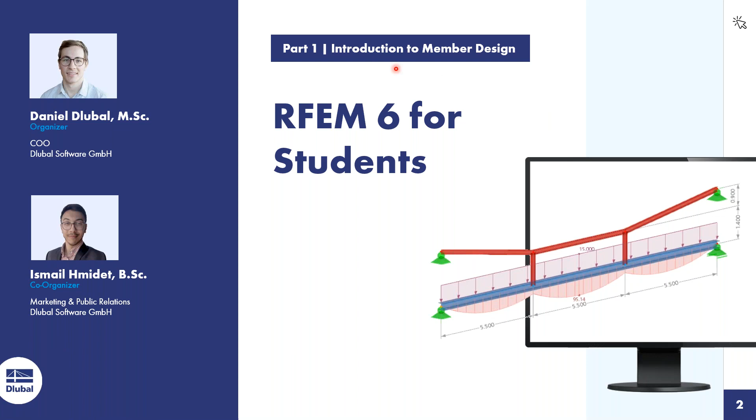Okay, I will stop sharing my webcam so that you have the possibility to see more of the screen. So, the first part of this online training series, RFEM 6 for students. We have the part of the member design today. So we will give you an introduction to the member design and a few words on our platform, GoToWebinar.

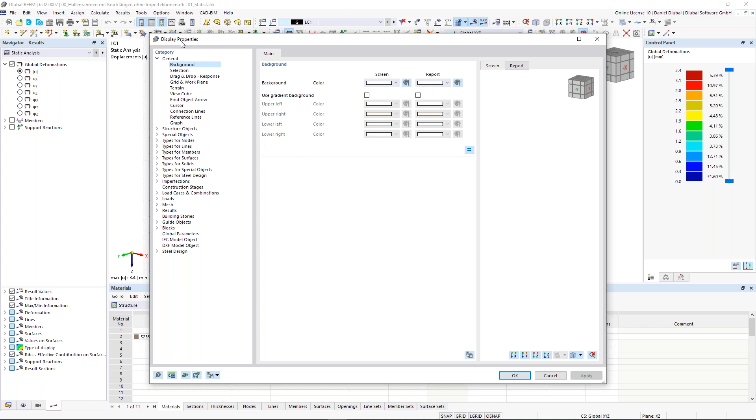Options is quite interesting. I work with a white window, maybe some of you use a black window, no problem. When I go to the display properties, I have the possibility to change the background, load dark background. When I click on that, it changes to dark. So it's up to you. I prefer the white background, so I go back to Options, Display Properties, choose the white background and click on OK.

We have today a lot of international students. So for those it's interesting that we also offer the program in different languages. Let's click here on Program Options and Settings. In the Settings tab, you can choose a program language from these. So for the French, Spanish, Italian guys, and so on, we have this language. Okay. And then I have also some other options, but for now it's enough to know that in the menu bar you find all necessary functions and commands. Good.

Then we have here the symbol bar. The symbol bar is fast access to the most important symbols you need during modeling, calculation, and load application of your structures. If you want to create a member or lines, just click on that, and then you can create it. I love working with them. It makes the whole process very fast, and also some visibility options here and so on.

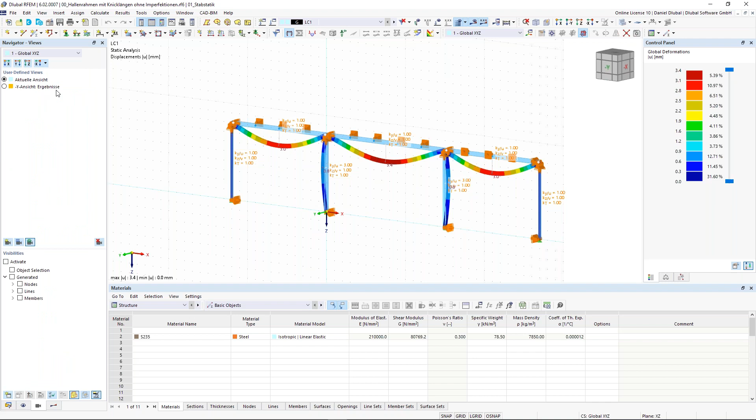Currently I see the structure from that view, and when I just want to see the results from the global y-axis, or against the y-axis, I can click here and I see it like that.

Then I also have the possibility to set up some visibilities. I activate here, for example, members, and choose here the member by section. I am interested in the IPE profiles, and I see it here like that.

Perfect, so let's jump to the last navigator. This is the result navigator. Here I have the possibility of showing different results.

So in this case, the global deformation. When I'm interested in the internal forces, I activate the members, activate the internal forces, for example normal forces, bending moment, shear forces, and of course also the support reactions.

Yeah, so much to that. Then we have the tables, where you have a whole overview of all objects. You can also create objects in the tables, edit them, and change values. This is a huge advantage because it gives you a very structured, very good overview, which is very clearly structured.

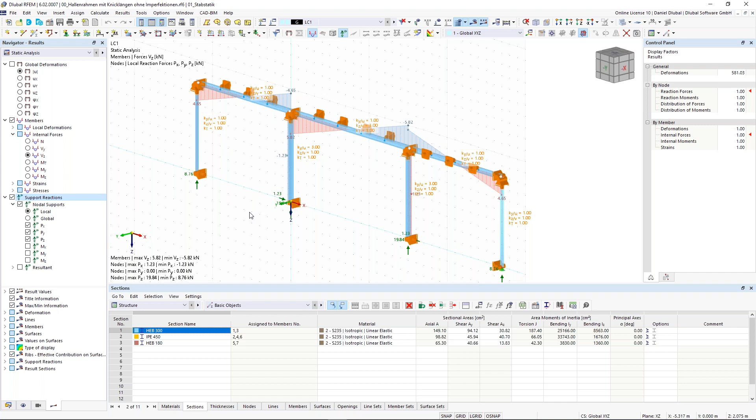Okay, now the control of RFEM 6 is quite easy. It's familiar when you are familiar with other software applications like CAD programs, AutoCAD from Autodesk, then you will get familiar also with RFEM 6.

So with the left mouse button, I can select different things. When I go from the left upper corner to the right bottom, then I can select all objects which are included in the selection window. When I go from the other side, I select all things which are also in this window, but not as wholes.

I can select them as a whole object, so everything that is touched within this selection window will be selected. Okay, so much to that.

When I want to select more objects, I click on one object like this member and press the Control key on my keyboard, and now I choose another. I add new objects to my selection by pressing the Control key. In this case, I select different members. And when I want to deselect some members, I just press the Shift button and deselect some objects from my selection.

By right-clicking, I activate a kind of context menu. It shows me some interesting information, like the display model. I can change it to the wireframe model, or maybe deactivate the loads or the results.

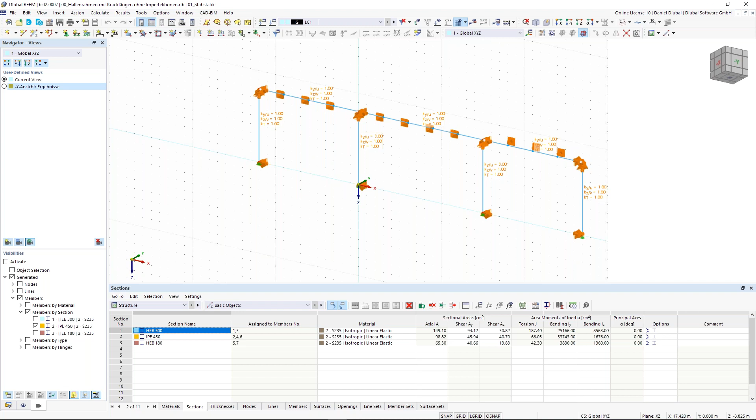Very nice. You can also use this view cube. It's a new function in RFEM 6, makes it a lot easier to change your views for your structures.

Okay, good. This was the introduction to the user interface of RFEM 6. RFEM 6 as a program is a 3D FEA program for the calculation of members, trusses, but also for surfaces, shells, and also solids. With RFEM 6 as a main program, you can calculate and get the results of internal forces, stresses, support reactions, and deformation.

When you want to perform different material-based designs like steel design, timber design, and concrete design, you need the add-ons. The add-ons will be part of our later trainings in 3 or 4 weeks, where we jump into the steel design, concrete design, and timber design.

Okay, now let's start with a very simple example. So for those who would like to model with me, now follow my steps. I create a new model by clicking here in the file menu and selecting create new model.

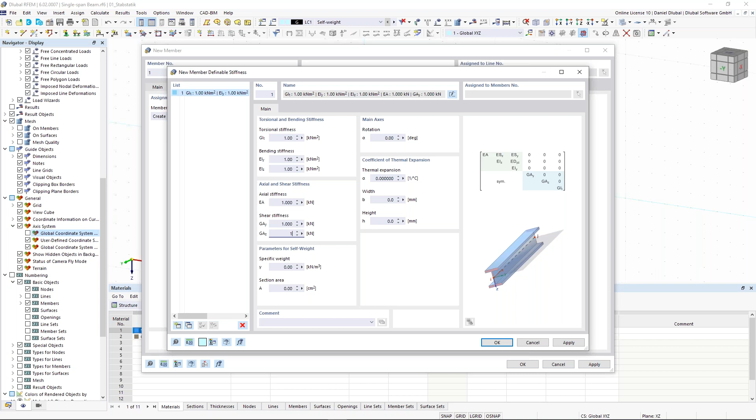I go here to the register definable stiffness and create a new stiffness. Click on that, and now I insert very small values, because in reality we have higher values, but for this example it's enough to insert this kind of pseudo stiffness. I click OK, click again on OK, close the member window, and then you see the member activated. I click OK, and the example is ready.

So you see here this member as this kind of thing. Now we need support. I go here again to the symbol bar, click here on assign nodal support,

and I choose here the hinged support, so I will activate all translational forces. Choose this node, right click to close the function, and now I go back again and choose the support with the roller in the X direction in order to release the X forces, and now I have here a single beam.

I can show me the supports a little bit bigger just by right-clicking on it. I can adjust the size of the graphic, and now I activate load.

In RFEM, it's like that when you want to create loads, you have to assign them to load cases. And by every new model, one load case, in this case the self-weight, is already done automatically in the background.

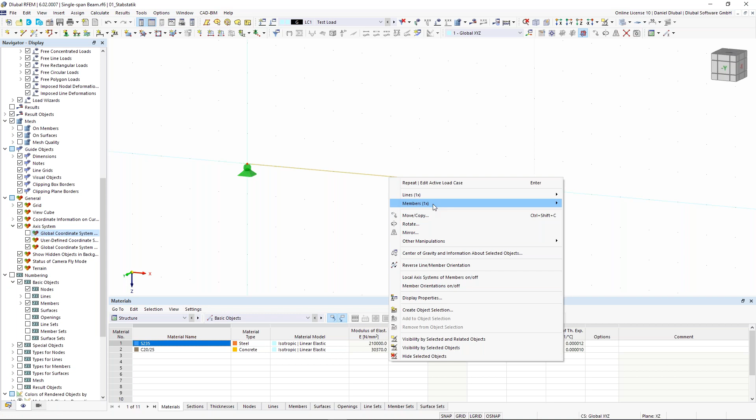And now I divide here this line, because in the middle of this member I want to create a node, and on that node I want to create a single load or point load. So right click on this member, and I divide it by distance. Now let's enter here the value of 4.5 meters - the other one is calculated automatically. And now the important thing is to create on member nodes without dividing the member.

So activate this option. Then we get a node which is part of the member and doesn't divide the member into two members. I click OK, and now you see what I mean - we have here one member and this one node, part of the whole member, and the member wasn't divided into two members. It's a huge advantage, because then I can take a closer look at that member as one member.

So now I create my single load. I go here again to the symbol bar, click here on new load, and now I click on assign to nodes. So here I select the node in the middle, I can draw a selection window, click OK. Enter here a value of 10 kilonewton. I say OK, and we have here the load.

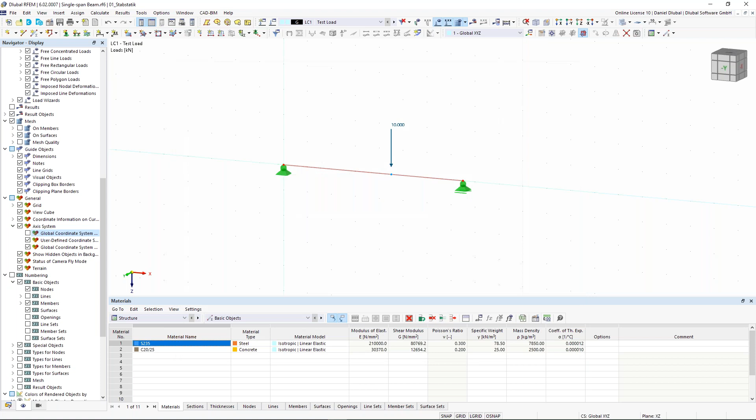Okay, so first of all, we see the deformation. The deformation is, of course, a little bit nonsense, because we have 99,000 millimeters deformation, because we don't have any stiffness. But in this case, only the internal forces are interesting for me. And when you have statically determinate systems, then the stiffness of a structure doesn't have an influence on the internal forces. Only when you have statically indeterminate systems does it have an impact.

Okay, so I go here to members in the results navigator, and I activate the shear force. I see the shear forces in kilonewton, and then the bending moment, My, 18 kilonewton meter. Okay, interesting. So now I activate the support reactions. I see the support reactions, also pretty interesting. And now you can make a kind of plausibility check. Compare the support reactions with the shear forces, for example, and they are the same.

So this was the first example. Pretty simple, of course. For the next examples, I will use real cross sections because this makes, in my opinion, more sense. It was just an example for when you are at the beginning of the semester, you have started your bachelor, and you calculate some structural systems. Normally, you don't have any information about the stiffness, and here you have the possibility to consider these kinds of exercises.

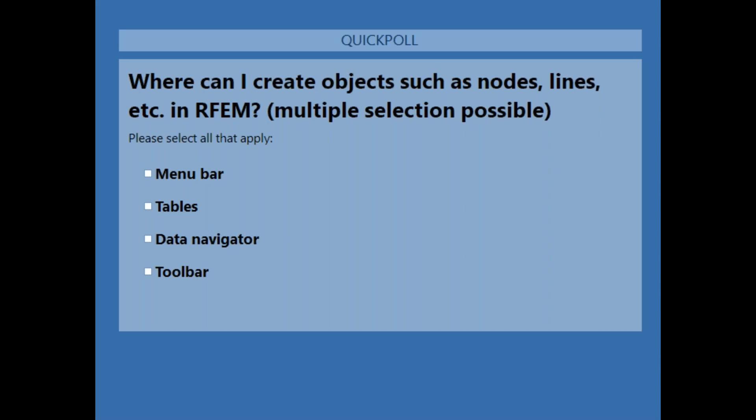Okay, good. I will close this and share the results. It was a multiple selection, so several answers can be correct. And in this case, all shown answers are correct. So I can create objects with the help of the menu bar, tables, data navigator, and also the toolbar. Okay, let's go forward with the next example. This example is also for those who want to do this in parallel with me.

Daniel, yes. Before we move on to the next example, I just wanted you to highlight the difference. I got the question: what's the difference if the member were split into two? There's no difference in terms of structural behavior, right? Exactly, absolutely correct. There's no difference in the structural behavior and the results, just in the result interpretation.

It makes it easier for you because you can choose this one member, and when you would like to see the results at one member, just right click on the member and create a result diagram, and you see it as one result diagram. This makes it easier. Or when you want to edit several members, and you have several nodal point loads, it's easier for handling and usage. So there's no difference in the structural behavior and the results, just in the handling of how you define these nodes. Exactly. Thank you.

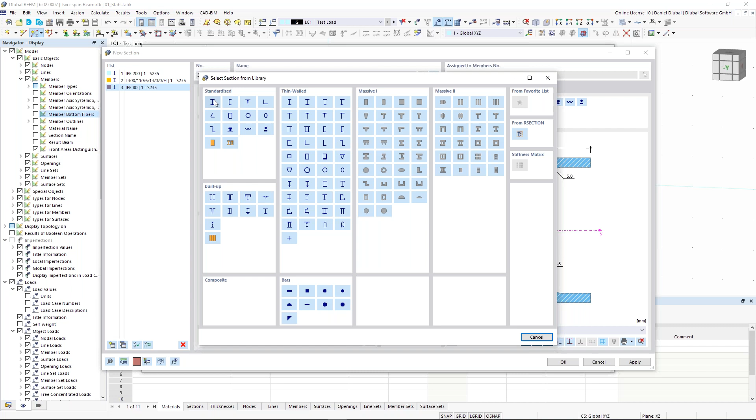And I open here the cross section library. And I am looking for a standardized profile, so in this case, an HEB profile. So I scroll a little bit down and then I will find here this HEB profile. I refer to the Euronorm, so more to the Eurocode. And here I find HEB 300. This is absolutely fine for me.

When I know the profile, then I can also insert here the name of this profile, and this makes your searching for the profiles much faster. So just insert here HEB 300 and you jump here to the existing profiles based on our search function. And this makes this whole thing very fast. And now I choose here this Euronorm, double click on my HEB 300 or just press here OK.

So, and the same thing we can also do with the material. I use for this profile an S235 material, so steel with a yield strength of 23.5 kilonewton per square centimeter. I can also create here a new one, searching for it with the help of the searching function.

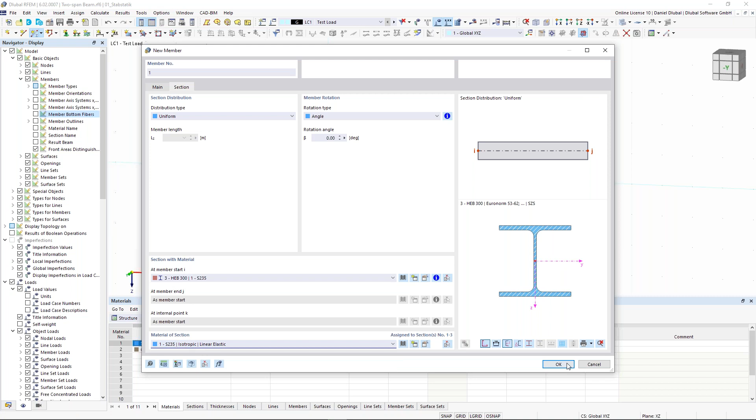So I can enter here S235 and now I can choose here the one I would like to have. But I don't do it because I have it already here in this case, so I cancel it and I just need here this one. Okay, I click on OK. And now you see here for my member start, I have here this HEB profile and this material. I click on OK.

And now I create a beam with a length of 5 meters. So just go here to this grid point, 5 meters, and again 5 meters. So the total length is 10 meters, but in the middle I have here this node. So the next thing is that I want to have here support directions. So I activate here this nodal support again.

And now a very interesting function in RFEM is that we have here also this apply button. And I show you how it helps you to define or assign different objects easier for your structure. So for the first node, I would like to use here this hinged support. So I choose here this hinged, this node, click on OK. And now I don't click on OK, but I click on apply. And this node

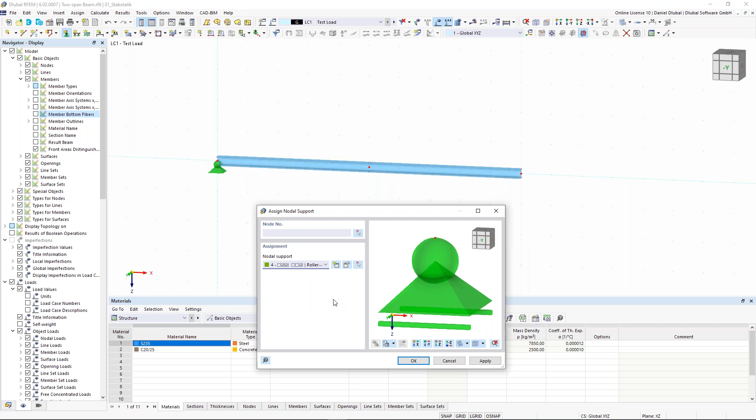will be created automatically. And the next thing is that I change here the nodal support, choose here roller in the X direction, and select both nodes with a selection window. Click on OK again. And now I click again on apply. And now you see how easy you can do this with this dialog. I click on OK. And now you see here the structure. Perfect.

So what's next? The next thing is that we consider now different load cases. Because when I refer to my PowerPoint, I will show you my PowerPoint. We have here this two-span beam, the information about the profile and so on, and also here 3 different load cases. And I would like to combine them in order to determine, first of all, the results, like support forces, internal forces, and so on, but also the governing or leading load combination that causes the largest internal forces. Because we will have here also 2 additional load cases, the imposed loads, first for the left side of the beam, and then for the right side of the beam.

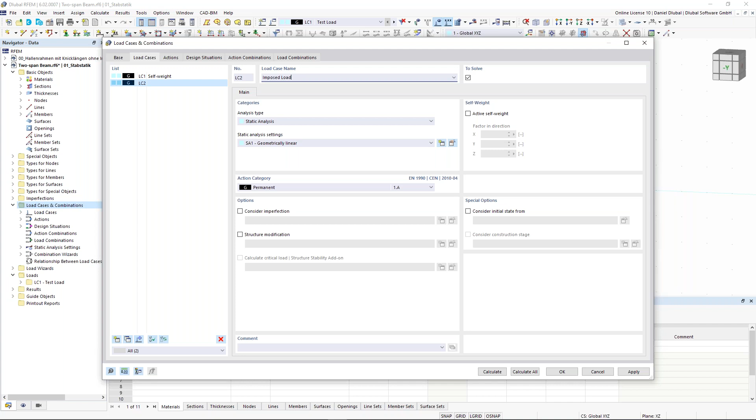I activate here the self-weight. And I create 2 new load cases. So the new load case is imposed load left. I choose the correct action category, in this case imposed loads category A, according to my European standard. And now I copy the load case and say right, because with that load case I apply the loads on the right field of this member.

Okay, now let's go through the tabs. So actions, I think this is pretty clear. I have here this permanent category, so permanent loads, in this case the self-weight, and here we can see which load cases are affected by this. Then imposed loads, these two load cases, and I have here different action types. Different action types: alternatively, differently, and simultaneously.

When I choose simultaneously, this means that both load cases can be combined with each other. Alternatively would be they would exclude each other. So simultaneously would mean that load case 2 can be combined with load case 3. Alternatively, load case 2 with load case 3 can't be combined.

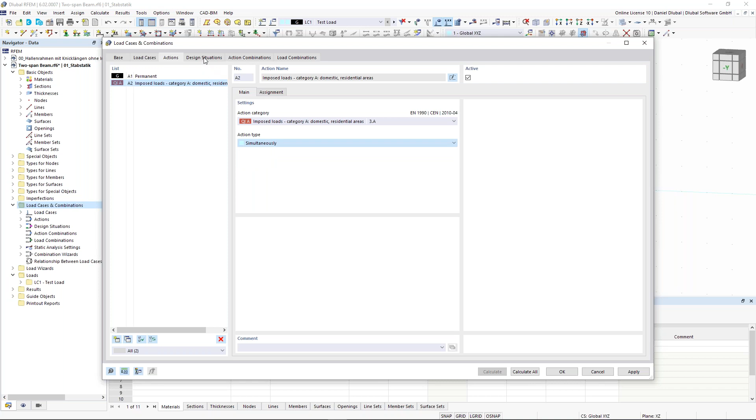Okay, so let's go to the design situations. According to the Eurocode, the European standards, we have different design situation types. The serviceability state isn't interesting for me, so I delete them. Just the ultimate limit state. I go here through the information, and here you see short information about the combination rules. So the permanent factors, partial factors, and also some combination coefficients. So it's interesting how the program combines the factors for the load cases.

So now you can see here the action combination. Now let's jump to the load combination, and let's pick this one. So here you can see the partial factors, that is 1.35 times load case 1 plus partial factor 1.5 times load case 2, and so on. And here you see also these leading load cases or leading action categories. It's pretty interesting to know how the program considers these different load combinations. A load combination is nothing else than a combination of different load cases under the consideration of these partial factors and combination factors. Okay, I click on OK.

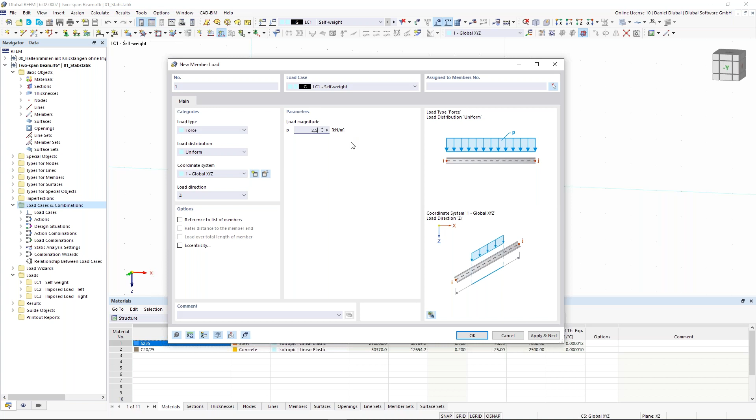So I click here on load case 1, self-weight. The load magnitude is in this case 2.5 kilonewton per meter. Now I select the members, draw a selection window because I want to select all members. I click on OK, and now apply and next. And now the perfect thing is I can change the load case, change here the load magnitude to 5 and assign it to the other member, but stay in the same dialog. This is pretty nice. Makes a lot of fun for me.

I click on OK, say again apply and next, and the same thing I do for the right load. So for the right field, click here the right field, click on OK, and in this case it is enough when I click on OK. So let's make a kind of plausibility check, go through all load cases. I have here the self-weight, the imposed load left, then the right one, the ultimate limit state. So this will give me an overall result of all load cases. And here we see it with the partial factors.

So maybe some of you know already what I want to reach with that example, because I want to see which load combination is responsible for the highest field moment and for the highest support moment. And this can be done with this ultimate limit state, with this design situation. So now I would say, let's calculate it. In this case, I choose here calculate all.

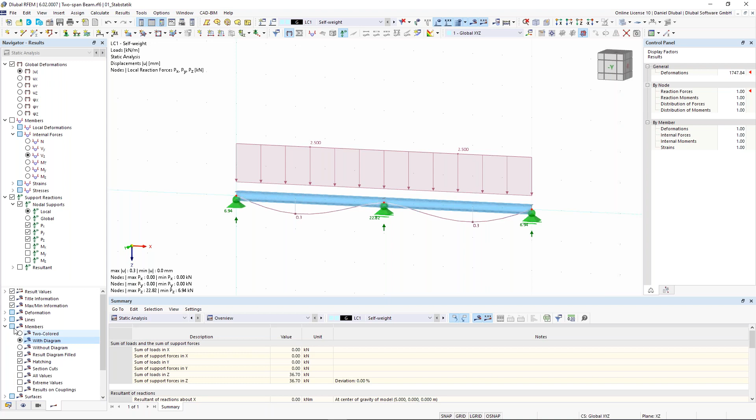Go here to the chapter area members, with diagram, and here deformation section colored. So this is a deformation, sorry. So the area members deformation, section colored, would look like that. You can see here on the right side a kind of control panel where you can see these colors.

Okay, the next thing is the verification of the vertical support forces, and I see here as sum, the sum of loads in the Z direction is 36 kilonewton, and the same sum here in support forces, so there is no deviation, and this is good for me.

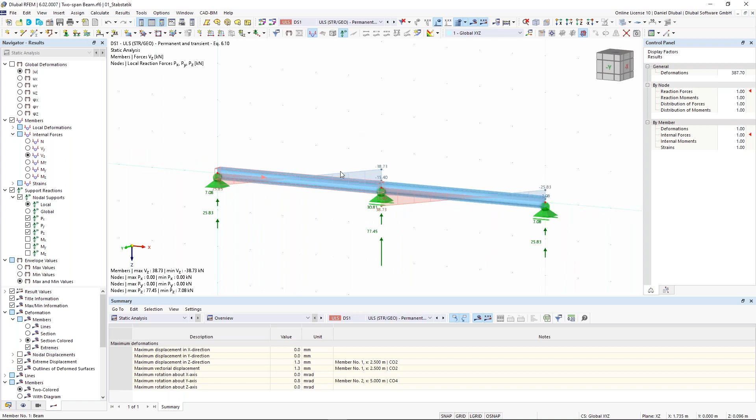Okay, the next thing is, let's go to the design situation. And as I said before, I want to see envelope values. So let's go to the members, and now you see here different distribution values of the shear forces and also the bending moment. And I can say, okay, please show me the maximum values. So in this case, the maximum field moment.

And when I take a look at the minimum values, I see it here. So the minimum is here minus 37. So the support bending moment. Okay, this is the summary, and now it becomes interesting because I want to see the results by member. So I go here to the table, static analysis, results by member, and I go here to the internal forces.

And now I want to take a deeper look at the maximum field moment and the maximum support moment. So the most minimum and the most maximum value. So here I go to the extremes area, and here I see these two results.

I see here the maximum value of the bending moment My, and now I see also the corresponding loading, and this is in this case load combination 2, and for the minimum value it's load combination 3. Now let's take a deeper look at how the load combination looks. So load combination 2 was this one. I think this is pretty clear. And load combination 3, here we have the support moment. Okay, this can be done with the design situations, a pretty interesting tool and function to know.

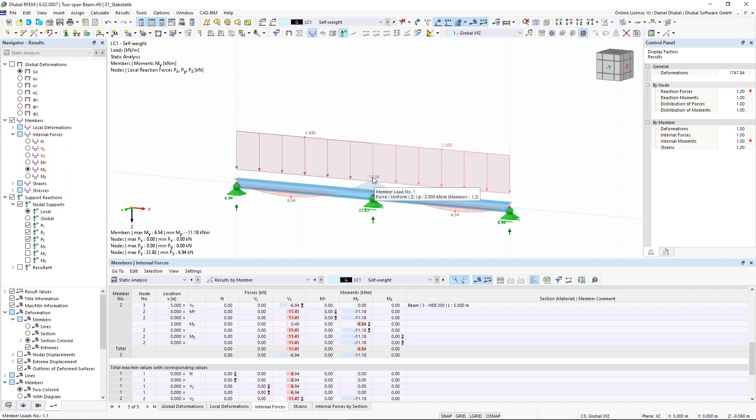What is the shear stiffness? Taking into account shear stiffness leads to an increase in deformation due to shear forces. In order to deactivate it, you have to go to the cross-section. So remember here the support bending moment of minus 11.18 kilonewton meter. I go here to the sections, in this case HEB, double click on that. And now you can see here deactivate shear stiffness.

And the influence of the shear is dependent on the cross-section areas Ay and Az. When I deactivate, they have no value, and the shear stiffness isn't taken into account. And this can also be considered for your hand calculations. Because when you calculate by hand with the help of tables in your books, then it is kind of rigid. The books take no shear stiffness into account.

But in reality, there is a little bit of shear stiffness, especially when you have solid cross-sections or timber cross-sections. However, it is recommended to consider the shear stiffness for the deformation analysis. But just in order to show you the different results, remember minus 11.18, I click on OK. I calculate this load case again.

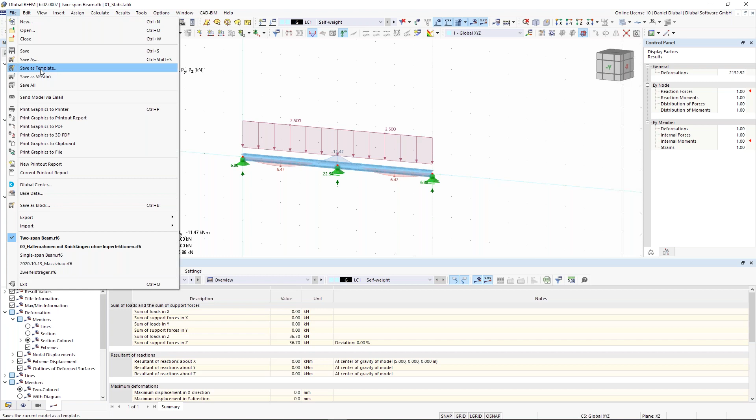And they actually asked, what if we're talking about codes or standards of different countries? I think you could probably show that we do have a lot of different standards predefined in RFEM. And in case you don't have the standard you need in RFEM, of course you can define those and save them as a template, as Daniel just showed. Right, Daniel? Exactly, you're completely right.

So if you want to take a closer look at the standards we support, go to your model and just right-click Base Data, or also here in the symbol bar you find this option. And as Ismail mentioned, we support different standards. Just go here to the add-ons. You can activate, for example for the steel design, different standards. So I click here on OK, and then you see that we support different standards, and also the different national annexes.

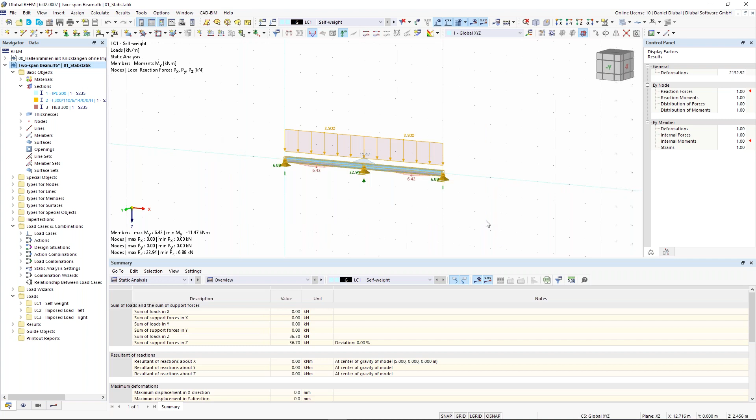Okay. So let's continue. Now I will do an example by myself, so I will make it a little bit faster. So just watch and learn. Oh no, sorry, I don't want to delete everything. Now I want to add hinges. This is one-time statically indeterminate, so I want to add a hinge here in order to make it statically determinate.

So how to do that? I click here on this member. Then, for better visibility, I change the visibility mode to wireframe mode. Then I right-click on Members and divide the member by distance. And now I would like to divide this member at a percentage of 17%.

Why 17%? In my German student book, it's called Schneider Bautabellen. There is a hint that in order to make the support bending moment and the field bending moment equal, the perfect position of the hinge is 17% of the length of one of these fields from the middle of the support. So I enter 0.17. This is given by my table book. The division point is calculated automatically. Then I click on OK. And a new member was created, because I will need this member for the creation of hinges.

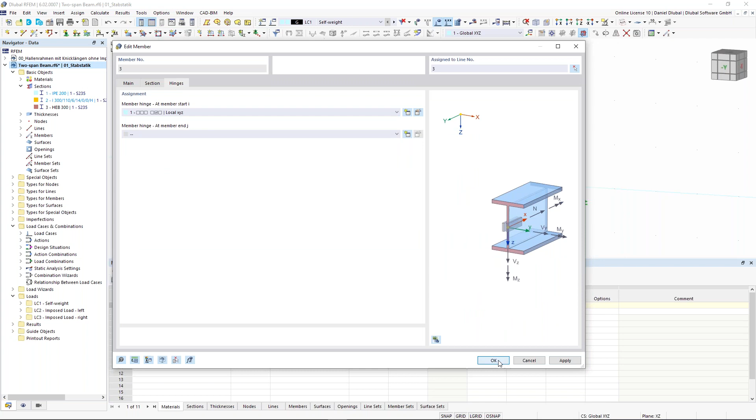Now I have the member hinge at member start. In order to see where my member start is and where my local axis is, I right click on this member, show local axis and member orientation, and now you see it. So from left to right, the direction goes from left to right, meaning I have my starting node on the left side and my end node on the right side. The member orientation is also compatible with the local x-axis of my member, and there I can also see the local axis.

So much to that. I deactivate this, and now I calculate this structure again. Now watch out, pay attention, and see what will change.

We have assigned here a hinge, and this hinge means that the moment is 0 there, and it is 0. Additionally, we see that the field moment is 7 kilonewton-meter, and the support bending moment has the same value.

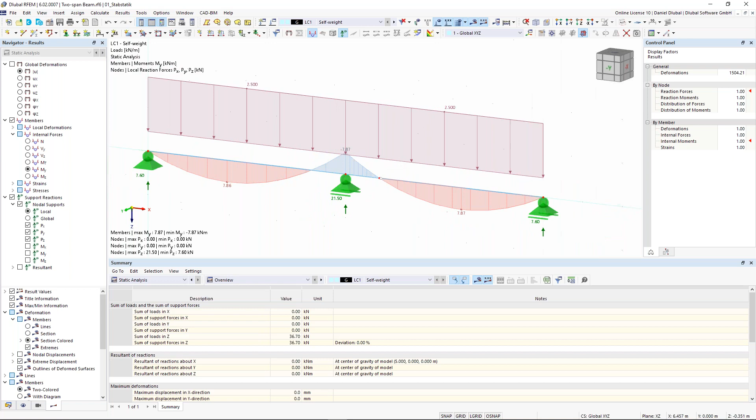Okay, so in your studies you work also with variables and parameters, and I want to show you how to do this also in RFEM. So when you have the exercise where this two-span beam has a length as parameter L, and this has a parameter, and this has a parameter, then you can do this also for RFEM 6.

So I go here to structure. This is something you don't have to do with me right now, just pay attention, I will show it to you. I have here the global parameters. I click on global parameters, and now I give them a name, L for length, then press the tabulator button. The unit group is in this case length, and the definition type is value. So I insert a value, but I can also give it a formula, but in this case a value. I insert 5 meters and comment it with length, so I know later that L is length meter.

And the same thing for this distance, this E, so this 17%, I give it the name E. Now I don't want to use a unit group here, I want to use factor, because it refers to the existing length by giving it a kind of percentage. And I give it here 0.1716, and this is the factor. Okay, I click on OK.

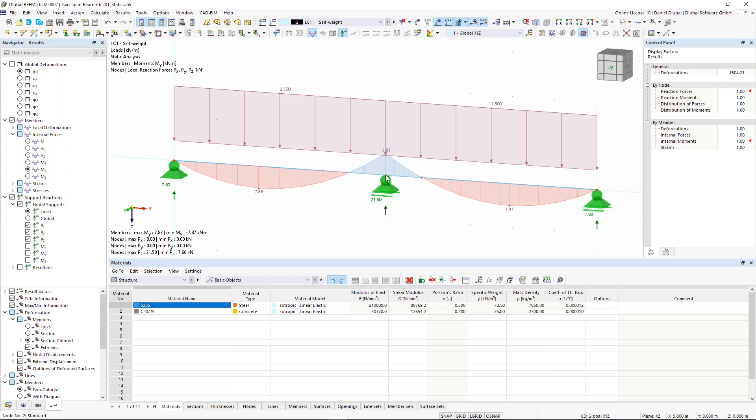Now I have to assign these parameters to my structure by manipulating the coordinate system or the coordinates. So the first node will remain at its position. The next one needs to be changed. I activate, double click on this node, I want to manipulate or set the formula, give the x coordinate the parameter L. So I click on this arrow, click on edit formula, insert my L parameter, and click on OK. Click again on OK.

And the same thing here for this node. I activate the formula, and in this case it's L plus the factor E times L again, 5.858. I click on OK. Last but not least, I do the same with the last one here, just pressing 2 times L, click on OK, click on OK again.

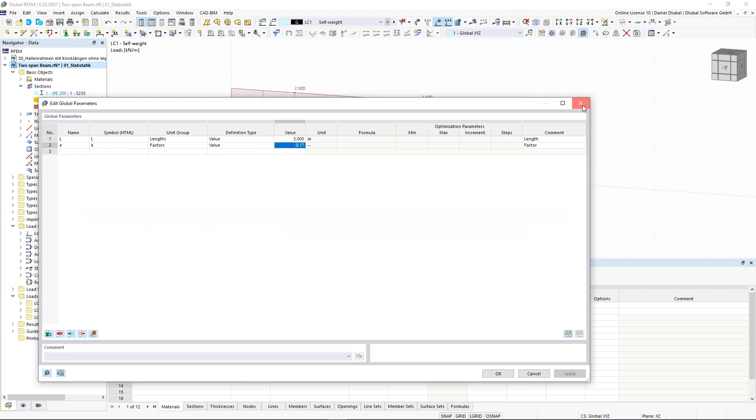And now I want to change the values, so pay attention to the structure. I insert here the value 4, let's do 3, and apply, apply. Now you see how the structure was changed through these parameters. Interesting, okay, so much to the parameters.

Next thing is just a structural system with various types of loads and also some supports. So I delete this again.

Now I will create the nodes with the tables. I go here to the structure, go to the tab nodes. The next two examples you don't have to do with me, I will do it a little bit faster, just giving you an overview about how you can do things in RFEM 6. So I create here a new node, going through the inputs with tab on my keyboard, and insert here the coordinate 0 and 0, press enter, and the next coordinate is 5 and 2, press OK, and the next one is 8 and 2, press OK, and now you see here that I have these nodes.

Now I create a new member, the same thing, the section is HEB 300. I click on OK and I connect the nodes in order to create my system. Right click.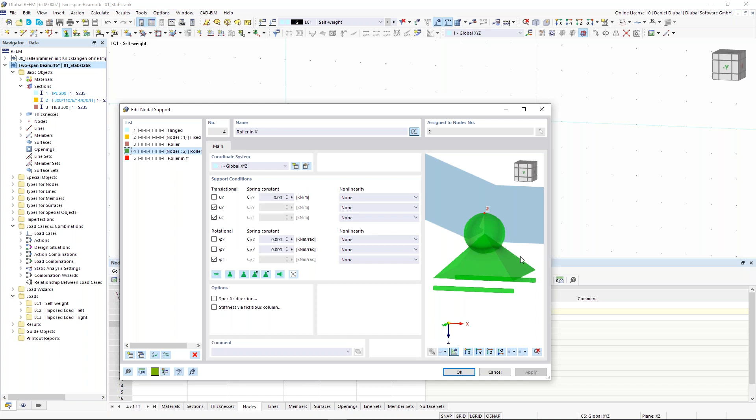I click on OK. And now I leave here this load case self weight, and now I assign or apply some loads. Just various loads, it is no realistic example.

I click here on new member load, and in order to have also some linear load distributions, I can say okay, I want to have that trapezoidal load distribution. I will start at the beginning of my member with 10, leave it here as 0, and say okay, at 80% it should stop. I assign it to that member, and this is now the nice thing that I can remain here in the same window. Okay, apply and next.

And the next member load is another one on the second member. So I activate here 1 and 2, give them here 20%, and choose the second member. I click on OK, and then I click on OK again. And now you'll see here the applying of these member loads, pretty interesting.

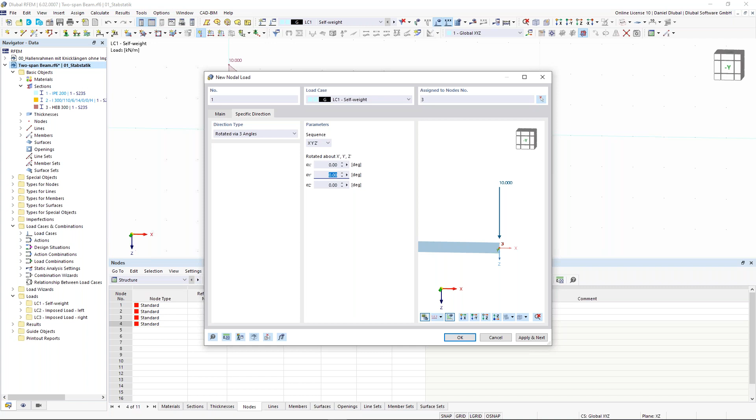And now the interesting thing is that I can see the image where the node will appear on the whole structure. I can see it here. And now I want to specify the direction. So I activate here this option, and a new tab appears. And there I say okay, around the local y-axis, minus 60 degree. And now it looks like that. I say okay. And I see the direction like here.

And one thing more, I can also give some nodes kind of imposed nodal deformation. So here I find this in the symbol bar. I say okay, new imposed deformation. And in the opposite of the global Z direction, I say okay, minus 20 millimeters. I assign it to this node. I click on OK, I say OK again.

Now I will calculate the structure. And for me, will be interesting the results regarding the deformation, because I set to that node a predefined deformation to that direction. And now I will see if it's correct.

Okay, well, internal forces, you can see the internal forces, shear forces, normal forces, and so on. But for me, it's more important the vertical.

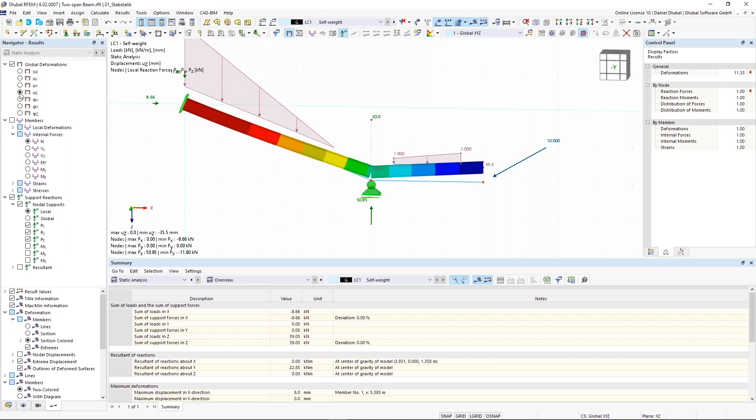Deformation of this node. So I activate the global deformation, and now I want to see the UZ, so the vertical deformation. And therefore, I just want to see the lines, because then it's more clearly to see the results.

Yes, it's correct. Although there is a support, we have deformation at the support of 20 millimeters in the opposite global Z direction. Okay, so much to that.

Okay, next example, and then we make a short break. I will delete this again. And now let's do a jump to my PowerPoint presentation.

So this was the Gerber beam, or the hinge beam. Here also I have attached the definition of this E. It's from my student table book, Schneider Bautabellen. Maybe you have something similar in your country, I don't know. This was the last example.

And now we do this two-hinged frame with a tension rod in the middle. So it's a pretty interesting example you can also do with the force method during your study. We have here this two-hinged frame, and now we give them an additional unknown parameter by adding a tension rod here in the middle.

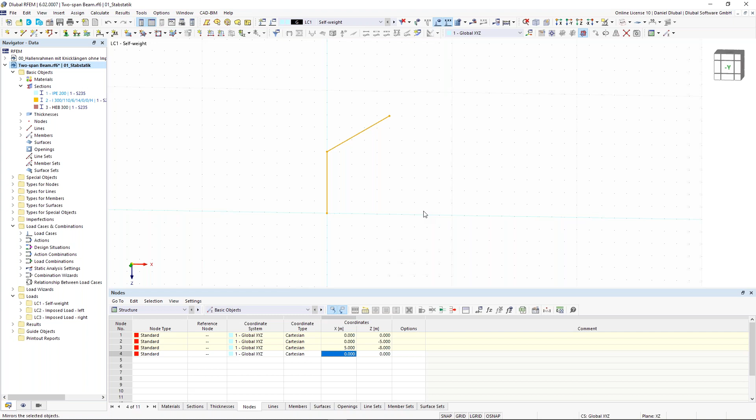Okay, the next thing is that we give them here an additional rod. And now we have different member types. You can see here we have the member type beam, and this member type transfers all internal forces to other beams.

I can add to that beam additional hinges. Let's do it in that way, and then I will explain you other member types. So hinges, I say to them the phi y should be activated, so that we will have bending moment hinges.

And for that kind, because it will get tension forces, I can choose a smaller profile. So I will create a new profile. I will choose it here, CHC. I hope it will find it.

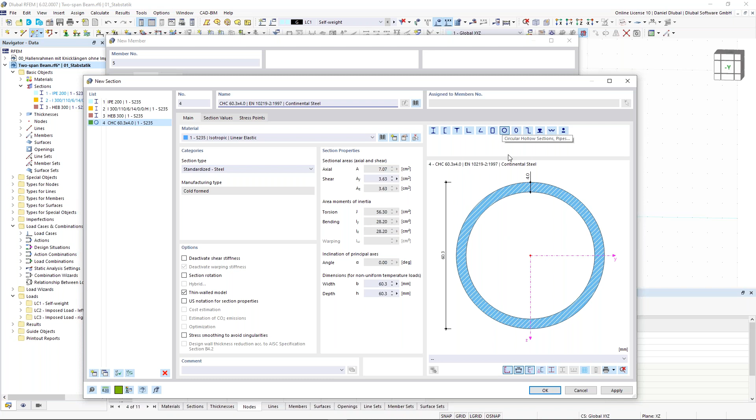Okay, and I choose here this one. It's a kind of hollow section, circular hollow section. Can be used for the applying of normal forces. Pretty nice. And I say okay.

Now I draw this tension rod from the left side to the right side, and I change here maybe the display model in order to see the right profiles. And now I create here the nodal support, click on OK.

And now I apply the loads. First of all, I see here my load cases. I have self-weight, imposed load from the last example.

I want to change it, so I go here to edit. I change here this one to snow, and this one to wind, and this one to...

...temperature, because then you see all possible load applications we can do. So distributed loads, single loads, temperature loads, or nodal restraints, nodal deformation, and so on, and now also the temperature.

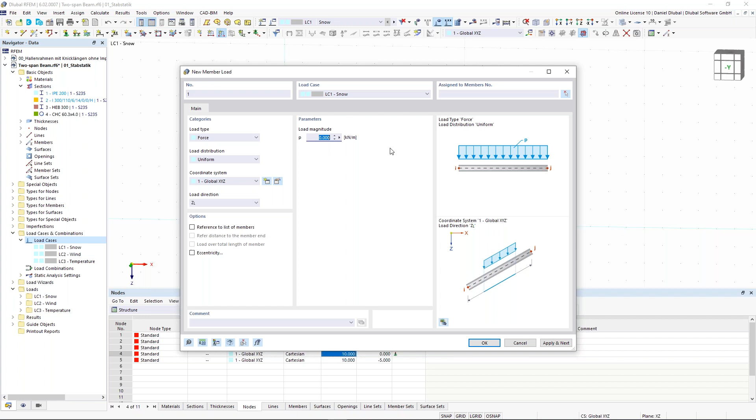Now I apply the loads. I jump here to the snow load, go here to the member loads, and I have here 1 kilonewton per meter. And now the load direction for snow loads is different.

It's not on the true length, it's on the projected length. I choose here both members. I click on OK. I say apply and next.

And now I choose here the load case wind. Here the direction is to the global x-axis. So I say true length, first of all on the column.

So it doesn't matter if you have it on the projected length or the true length, because the column is vertical. Column, I say okay.

And now I want to refer and apply my load according to the local member system. So I say, okay, I want to have it like that and put it here, because normally the pressures are on the local axis of my inclined beams. So I say apply next. Now it looks like that.

And now the temperature, I will do it here a little bit different. I cancel the whole definition because I wanted to show you how you can make an object selection. So first of all, I want to display different cross sections with a different color. So I jump here to the display navigator, scroll down to the area of the colors of rendered objects by object property, member, and now I want to see them by the sections, like here.

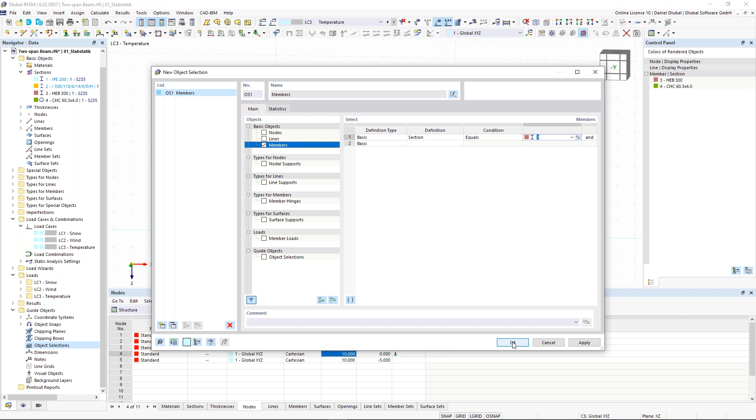this object selection. And now the nice thing is, now I can apply the temperature very easily, because these objects are selected, and I choose here the temperature change 35 and local Z, and I say okay. Good. Now let's calculate all load cases. Then we will take a closer look to the results.

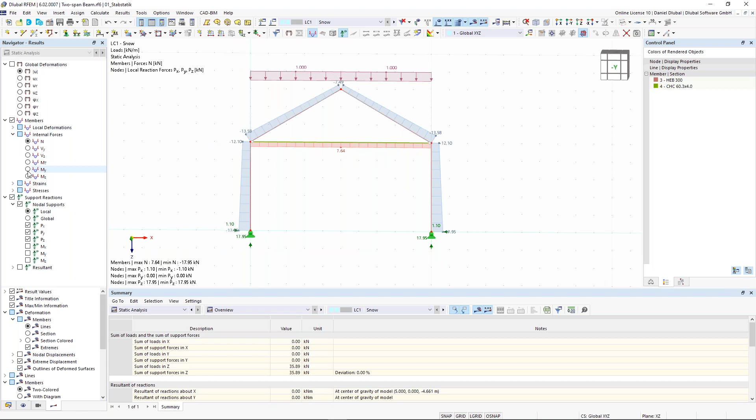Okay, perfect. So as you can see here, maybe for the snow load, you see here the deformation. And also the internal forces, and as assumed, the tension rod gets tension forces. And also when I take a close look to the members, I see it like here and so on.

So now we have in RFEM different member types. This member type is a beam, but with hinges at the end of the member. In order to consider the same structural behavior, I can also choose the member type truss. Truss is nothing else than a beam type, but with moment hinges at the end of the member.

Then we have also another thing. This is truss, only normal forces. So only normal forces are activated, no bending is possible. When I have the truss, the member can take some self-weight, and truss only normal forces. Let's do this truss only normal forces, and you will see how it will affect the results.

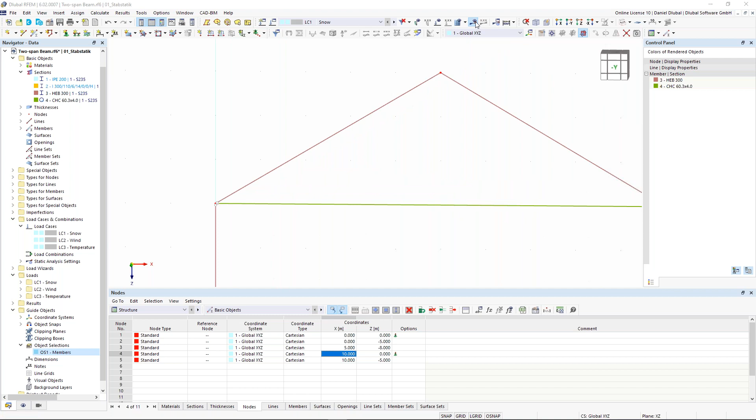So we can test it. I activate it. Yeah, and you see here this error and this failure because we have a singular stiffness matrix, because the structure is unstable in that node because of the chain of hinges.

And in order to avoid this, you have to remember just one thing. If you want to build here a complete hinge to which all members connect, then you have to leave one member without a hinge. So I show you now the correct modeling of this thing. I deactivate here the hinge, and now I want to have this whole triangular thing, so that all things are connected with hinges.

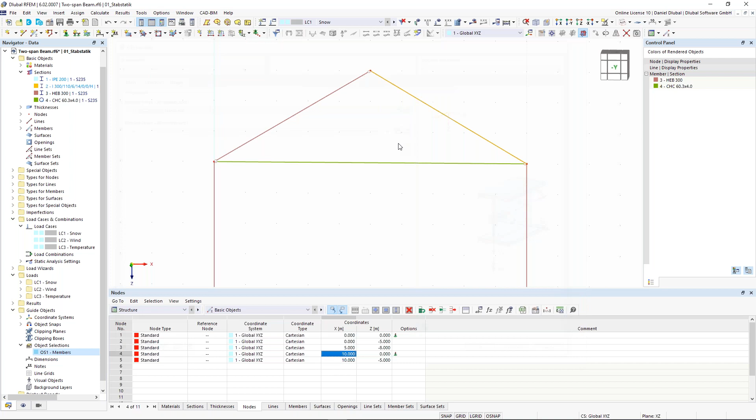So first of all, I change these nodal supports to fixed ones, and the next thing is that I assign here at the top also a hinge, and here the same thing for this member. Click on OK, and this would be the correct definition when I want to consider here hinges everywhere.

Now I calculate this, and when we take a closer look at the bending moments, we will see that the definition was correct. Yeah, and we see it here. Here we have the bending moment, and everywhere there is a hinge, we have 0 moments. And this would be the correct definition of the hinges for that case, for example.

Okay, next example: truss. I go here to the PowerPoint. So, ideal truss. We have here a truss with different members, and the members will have the member type truss, only normal forces. An ideal truss is weightless, straight, only carries normal or axial forces, tensile or compression forces, and all loads are applied on the nodes or on the hinges. In reality, we don't have any ideal trusses, but in your study, you'll learn how to calculate these trusses.

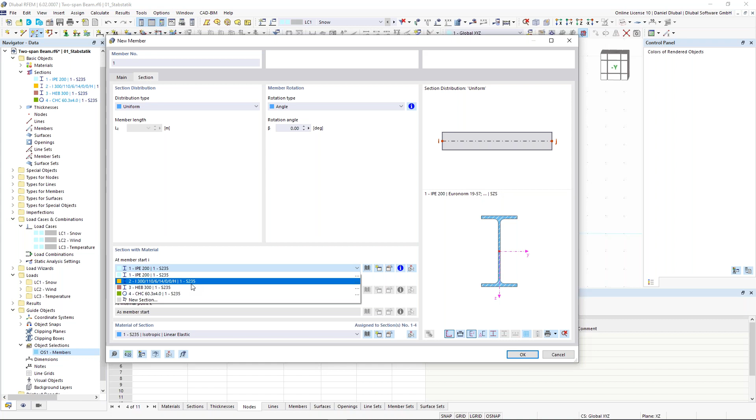And now I put here the length and also the direction. I have here 3 meters. All sides are similar, so I choose this one. 3 meters. Angle in work plane is in this case 30 degrees, sorry, minus 30 degrees. Then I can do this like this one. I change this. So, and now I draw, or I can refer to this member. I say OK.

From that array, and now I have here this triangle. And now, very important, my favorite function in RFEM 6: I select everything here, and now per drag and drop I can copy selected objects very easily. So I press the Control key on my keyboard, click on the left corner node here, and per drag and drop I copy it from there to there. Same thing again. I can copy things very easily. And this is my absolute favorite function. Please remember it, you will use it very often.

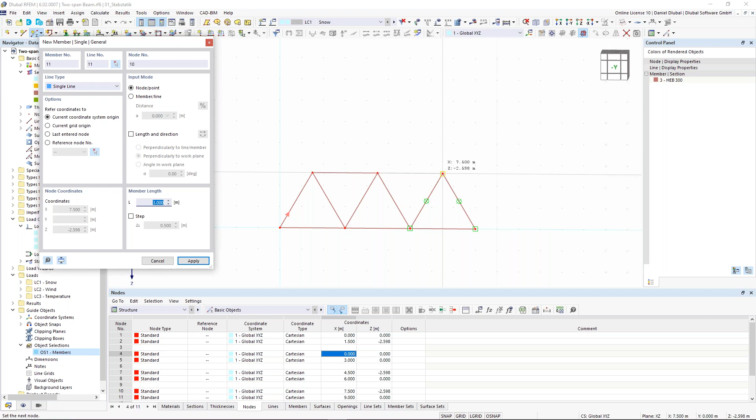And now I have to correct the member type because I saw I have created the member type beam. I select everything, and now it's okay when I just double click on one of the members, and you see, there are several members to assign, and I choose here truss, and I can change all members at once to the member type truss only normal forces.

Perfect. So the next thing is assigning them nodal supports. I give them a nodal support, hinged, and here again. I make them a little bit bigger, like that. And now I assign to these nodes nodal loads.

So I go here, new nodal load. I select the first nodes with 10 kilonewton, click on OK, say apply and next, and the next one with 20 kilonewton I assign to the right node, click on OK, and say OK again. So again, show me the results. I say yes.

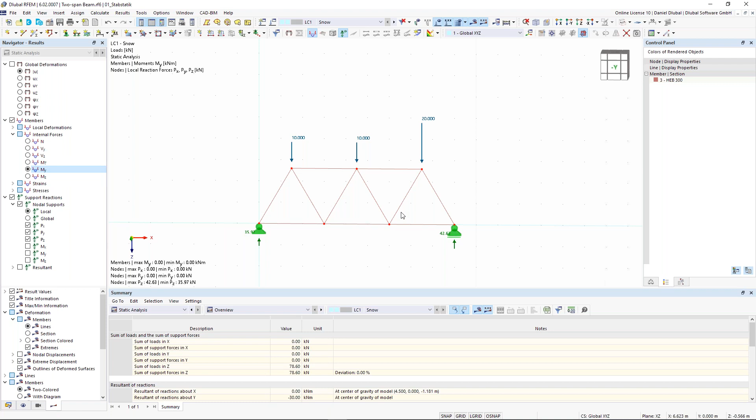And the special thing about the trusses, and also about the member type truss only normal forces, is that only the stiffness in the length direction is activated. So let's take a closer look at the results. And you see no moment, only normal forces. And when you see here member type truss only N, then you see only normal forces are carried, and only the stiffness in the length direction is considered.

So let's go back to the normal forces. Now remember, all compression forces are in general negative, and in RFEM, with the standard display options, blue, and all tension forces are in general red and positive. And you see, here I have the tension chord, and here the compression chord, and here you see the different normal forces. So again, negative normal forces are compression members, and positive normal forces are tension members. Okay, so much to that.

And then there are also some members called null members, Nullstäbe in German, which don't carry any loads. And there are different rules how to determine these kinds of null members, and you can also do this with RFEM. So I will add now these null members. I don't know if the English word is the correct one.

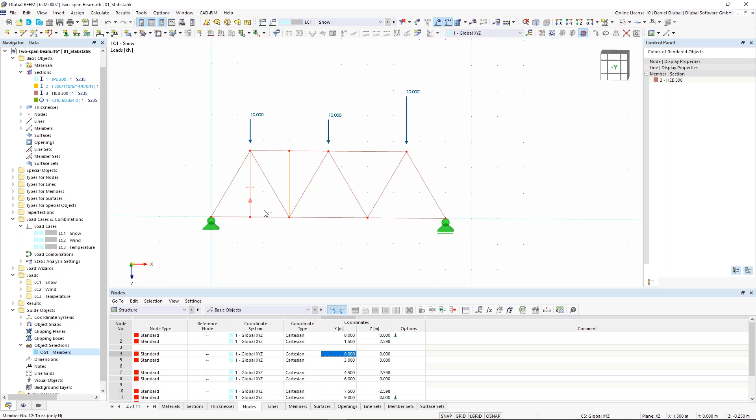I select here the properties, the same as here. Click on OK. And now I draw this member. And now again with my favorite function, drag and drop, press the Control key and copy it from one side to the other one. And the nice thing is you can also add more things to your selection, and I can easily drag and drop it like that. Perfect. And the last also for that.

Okay, good. And there are different rules in order to determine these null members. These are the members which don't carry any normal forces, but are sometimes responsible and also mandatory for the whole statical indeterminacy. So let's take a closer look at that. I will calculate it again.

And a classical student example would be: calculate this truss structure and determine also the null members, so the members which don't get any normal forces, and then you have it. And also determine the positive and negative normal forces, so the tension and compression members.

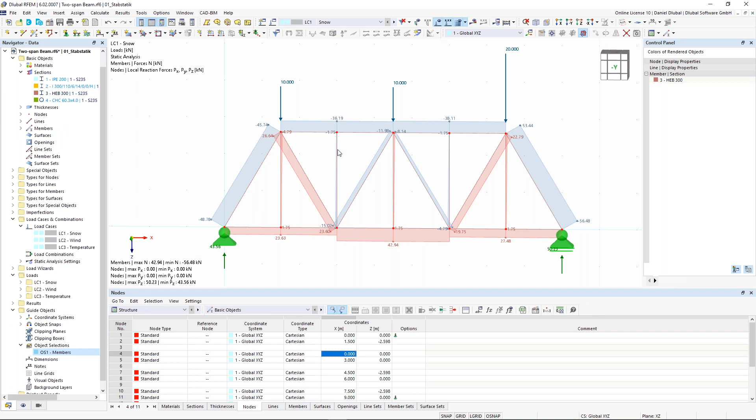As you can see here, these things get some normal forces. This is a little bit strange, but I can tell you why they get these normal forces: because I considered the self-weight. Here in this load case, I deactivate it. Now I calculate it again, and now you will see that these members don't get any normal forces because they have this structural behavior. Yeah, no normal forces. So much to that. Okay.

So I have a poll prepared for you, which summarizes this chapter a little bit. So this one. Okay. Let's close this poll.

And the correct answer is that compression members are usually truss members with negative normal forces. And in RFEM 6, this is usually the case for these blue colored normal forces, because there we have also a negative value, and now you know it. Okay.

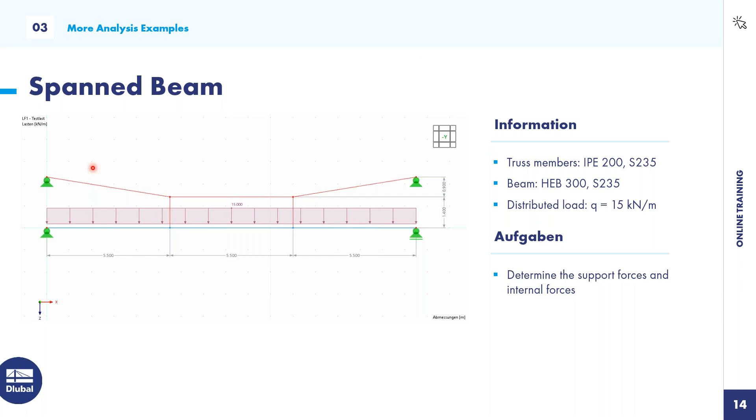So I create here again a member with a HEB cross section. I click on OK. And the length of this member is 16.5 meters. I say OK.

And now I divide this member internally in order to get two nodes. So right click on that, members, and divide member, and intermediate nodes, because they will have the same length. I click here on 2 and select here this option. This option will cause that the member is not divided into different members, but we will get the nodes.

So here we have the blue nodes, and you see, when I go through the member, it is one member and not three members. But I have here these nodes, and this is pretty nice because then I can refer to this structure more easily and see the results more easily.

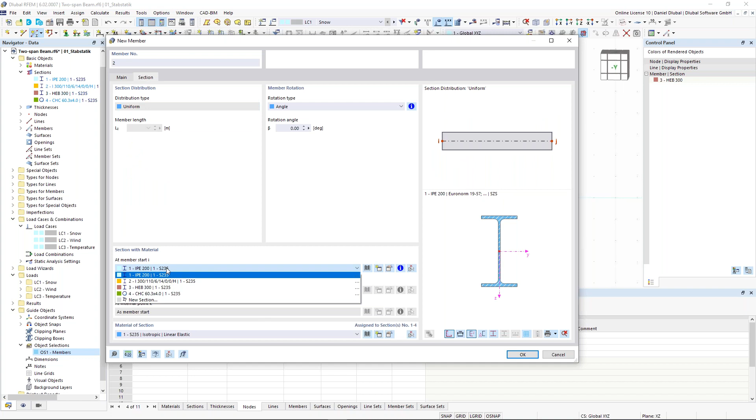So the next thing is that we create another kind of member. In this case, the truss, only normal forces. Section is in this case this IPE 200 profile because it's a little bit smaller. And now I just choose here the length and direction, 1 meter, and go here 1 meter upwards. Here again.

And now I want to create here also a member. I choose here these two nodes and these two nodes by clicking on the Control key, right click on one of the nodes. I say move and copy. Now I can create a copy of the selected nodes. I say yes, I want to activate it. I choose here the displacement vector in Z, and this is 2.3 meters. I say okay.

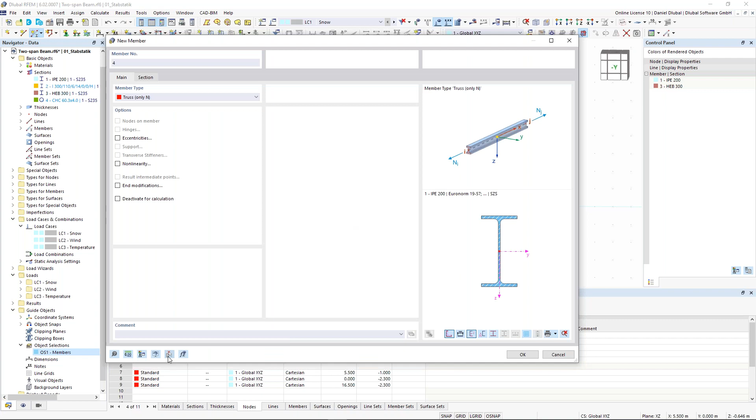And now I will connect these two lines. So I take here this beam. In this case, the truss only N, and I refer to this cross section. So I choose here always this select object properties in graphic. I click on OK. Now I draw it. So perfect.

So I change here the display model, and now I see that these local node coordinates are incorrect. So I want to change them. I double click on one of these nodes and I can change here the coordinates, and in this case I want to change them to -1.4, so it goes a little bit upwards. I say okay, and now the structure looks like that.

Okay, now I have to assign some nodal supports. I choose here these nodes, give them this fixed support, and the same here for this one. This will be a roller support in X direction. Okay, and now I create also a new member load. I go here, click on new member load, enter here a value of 15 kilonewton per meter, click on OK, and choose here this member.

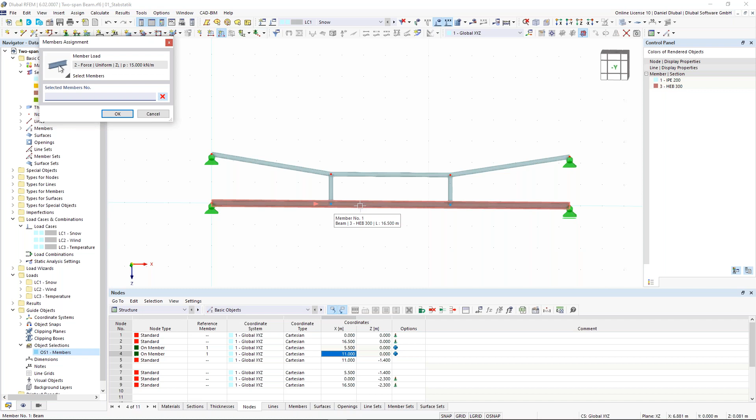The big advantage of this division with intermediate nodes is that I can assign this load and apply this load to one member. I don't have to click on these three members. This is one of the advantages when I divide the beam. So I divide this beam with two internal nodes, but the beam will remain as one beam. This is a big advantage in RFEM. Also the loads I can show a little bit smarter.

Yeah, now I calculate the result. Say yes. And now you see here the result. You see here the tension forces, because we have here activated the normal forces and also the bending moment. And this example is pretty nice because it shows the following thing.

When I take a closer look at the deformation, you see, due to the load applied on the beam, it deforms downwards. But we have here these tension members which carry the beam, and this is also the reason why these members get tension forces.

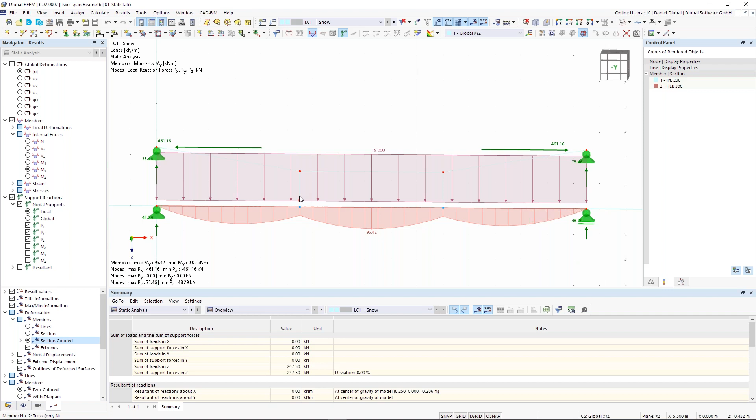And this explains also this interesting bending moment distribution, because here we get additional normal forces. You can see it as an additional support, and this is the reason why the bending moment looks here so nice. Also the normal forces. Okay.

So we do have a last question. Yes, Daniel, real quick about this example. I got a pretty interesting question about how we would model a double beam if for some reason the bottom chord fails, and if it's already in place and an engineer for some reason decides to add another beam, how would you model that in RFEM?

Like, would you add another beam over the old beam, or how would you try to model that in RFEM? I'm not sure I understand the question, but if you do understand, maybe you could answer it. Like if you have already an old beam as the bottom chord, and you want to add another one in real life, how would you model that in RFEM?

Because from what I can answer this question, I think you can either edit the beam or edit the section, or if you want to add another beam, logically speaking, you would need different nodes, because you can't just pretend that two beams are connected to the same point. So I mean, that's how I would answer it. But if you have a different answer, is it actually possible to add a so-called built-up after having the first beam already in place? Is that even possible?

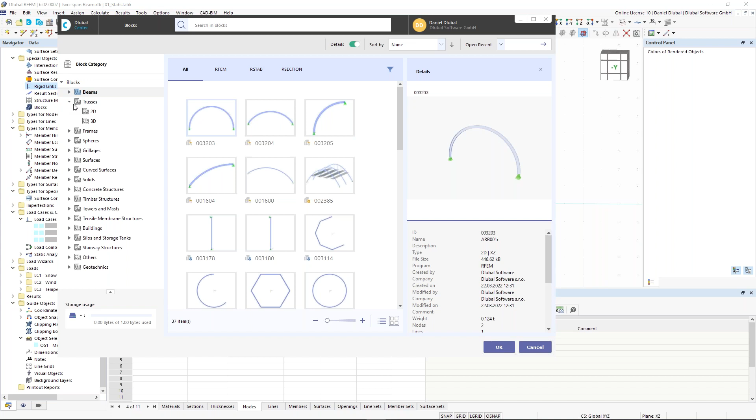So here in the Dlubal Center, we have blocks, and there I can create trusses, for example. I choose here this 2D truss, and I can generate very easily by just giving this block any parameters, this kind of truss. I click on OK. I choose this one. I say yes, because now the block requires the model type 3D, and this model type 3D we will also use for our next examples. So next thing is that we see here this truss, pretty nice.

For those who are familiar with programming languages and scripting, these kind of blocks were created with the programming language JavaScript. So if you are familiar with JavaScript, you can also program your own blocks, and this is very powerful. And this is also one of my future theories regarding the whole civil and structural engineering field, that the students should know how to program, because then they have a real advantage modeling, defining and designing their structures with different parameters. So I can only recommend learning JavaScript or any other programming language, even if you are a structural engineer.

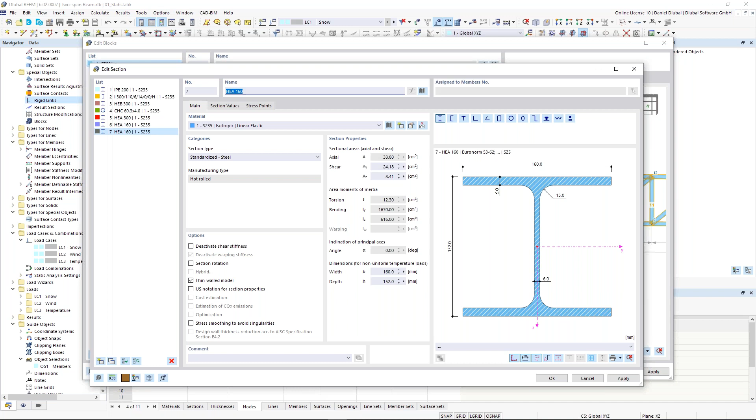And now I go here, HEA 300. Yeah, this is enough for me. Now I copy it and just rename it from 300 to 160. Same here, and then I copy the same thing here again. Now I will have here an IPE profile, also 160. This one, and I say okay.

Now I can assign the chords to my cross sections. For this one, I have here this HEA 300. The bottom chord is the same profile. The diagonals have this HEA 160s, and the verticals, because they don't get so much forces, an HEA 160. Okay, then I click on OK.

And I see the structure here. Very nice, because I see all different cross-sections according to the cross-section with a different color. This makes it more easier to see suddenly the correct cross-section.

And you see, okay, the trusses are modeled as members with hinges. So what you can do is selecting all members, double click on that, and give them here this truss behavior, and then you have the same effect. Okay, so much to that.

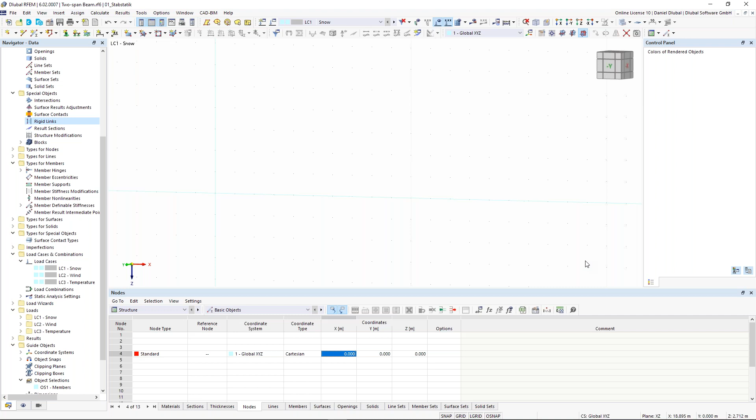So for that, I will model a very easy Euler case. So it's just a fixed cantilever column. So I create this one. I click on beam, and now the section will be an HEB profile. I click on OK. 10 meters high.

Meters high, and now we need here a fixed support, and on the top we need here a single load. In this case, I give here 100 kilonewton as vertical load, and also a small horizontal load in order to see the effects of the analysis according to the second order. I click on OK.

Now it will be interesting. Oh sorry, this is not correct. This one, I have to assign this one to the number 2.

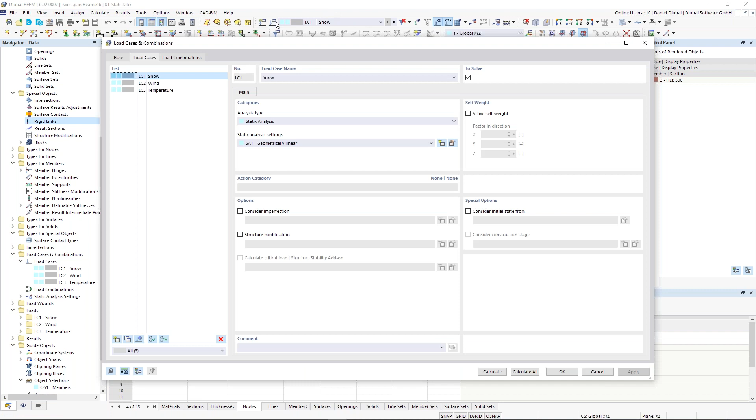Now I go to the load cases, because in the load cases I can assign the static analysis. So first of all, I will change here these two load cases, and I say to that theory first order, and this one will be the second order.

And here you can see static analysis settings. I have here a geometrical linear. So in general, load cases are calculated according to theory first order. So I have a geometrical linear calculation.

When I want to consider P-delta or the second order, I have to change here the static analysis setting. And normally load combinations are calculated according the second order. So I activate it. I go here to load case 1. Okay, you see here the load case 2 and load case 1.

And now I want to calculate both load cases, and then I will show you the differences in the calculation. I say calculate all.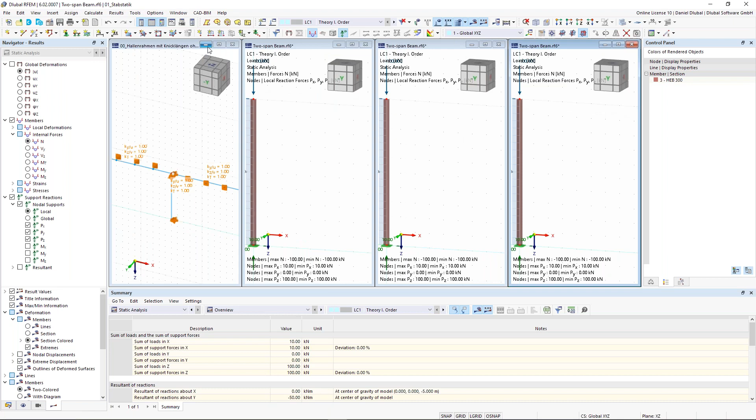So, okay. Now I will create new windows. I will create a new window here, and again, now I can show several windows vertically. This one I don't need. So again, perfect. So this will take a little bit. Here the same.

Okay good, here we have the results of the first order, and here we show us the results of the second order. So first of all, the normal forces, but for this fixed column, cantilever column, the bending moment is for me more interesting.

Okay, so let's take a brief look. I think calculating the bending moment of this cantilever column is no big problem, because 10 meters times 10, so 10 kilonewton times 10 meters, so the height, this is my bending moment here at the support. This is according the first order.

So when I calculate according to the first order analysis, then the program makes the equilibrium at the undeformed system. When I calculate according to the second order analysis, then the program makes the equilibrium at the deformed system. So you see here the differences.

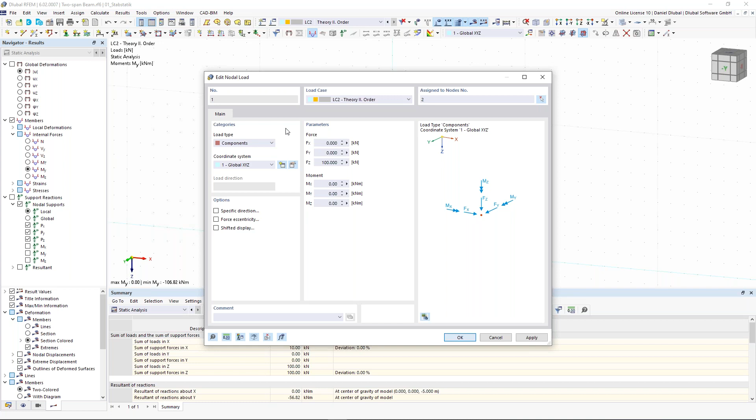I will leave this example, but delete the force in the X direction. I say okay, and here the same. So what I do now is perform a stability analysis.

Therefore I have to activate an additional add-on. I go to edit model base data, and jump to the tab add-ons, and activate here the structure stability. So what does this add-on do? It performs, according to the eigenvalue method, buckling shapes or buckling forms, buckling lengths, and also critical load factors.

Let's do this for this simple example, because everybody in your study has already calculated maybe a critical load for these Euler cases. We can do this also in RFEM. Let's activate this load case, and the only thing you have to do is activate here the critical load with the structure stability add-on in the load case, or also in the load combination. In this case we make it easy and use the load case, and you can also edit it. Here, edit stability analysis settings.

We have different stability analysis types: eigenvalue method, linear, non-linear. For our reasons it's enough to use this linear possibility. Here we can set up how many eigenvalues we want to have. For this simple Euler case, 4 are enough. Normally it should be also 2, and I'll say why, but I leave it as 4. Now let's calculate it.

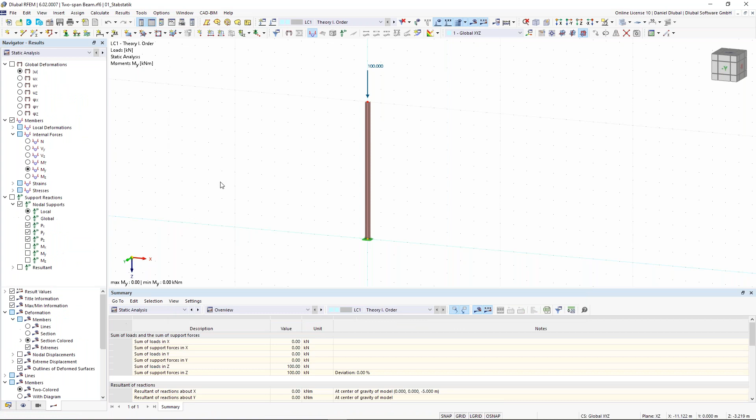Now you will see we have the normal static analysis, this SA, and then the structure stability, ST. Let's take a close look at the results. We have the summary, stability analysis, and then also on the left, stability analysis, in this pull-down menu. This is pretty easy: when you want to get the normal results like internal forces and deformation, you go to the static analysis. When you do a stability analysis, just go here and see the results.

So what can I see here? First of all, I activate the control panel again. I will show the mode shapes in order to make the display factor a little bit bigger. This is important to know.

The first eigenform, or the buckling shape, is this one. Why this one? Because the buckling shape tells me how the structure would fail when I would increase this vertical load, and this would be the failure form. In this case, the profile would fail around its weak axis, because the flanges show to the X direction, and this is the stiffer direction. So the first failure would be around its weak axis, and this would be the first eigenvalue, the first eigenform.

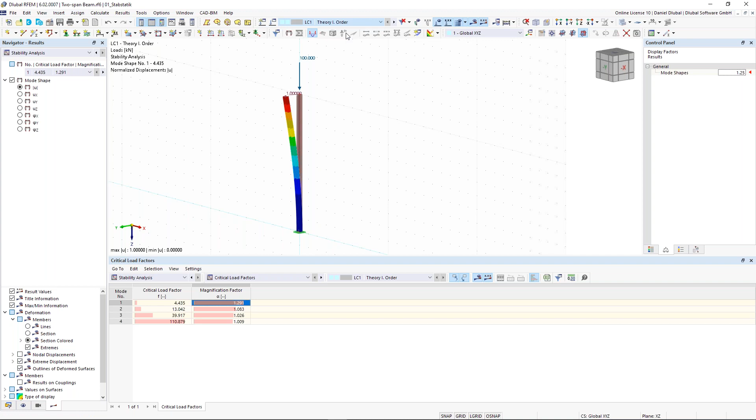So now let's make it unstable. I'm really looking forward to it. So we said, okay, 4.435. So let's go to theory second order and let's increase here this load to 444 kilonewton, because then we are over this critical load factor. I click on OK. And I calculate it, say yes.

And you see, okay, an error appears. Why? Because the stiffness matrix is singular, the structure is unstable. Because the existing load is more critical than the capable critical load of this beam here.

So, and when I want to take a closer look to the buckling length, I can go here by results by members, go here to effective lengths, critical loads, and here I see the effective length factor and also the effective length, and also here the critical load. So the eigenmode, the first eigenmode shows me an effective length of 20 meters. When I would perform a stability design in steel members, this would be the equivalent length when I would do it with an equivalent member method, and also here the effective length factor, and also the critical load.

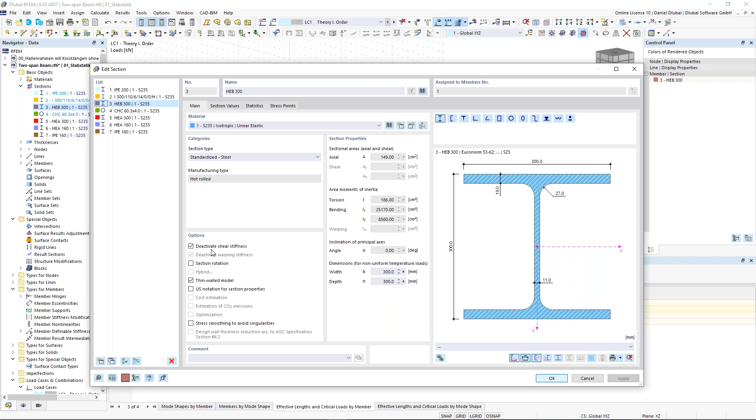Important note is that I have here deactivated the shear stiffness in order to get the same results like in my hand calculation, because we have here still deactivated the shear stiffness, but in reality you have a kind of shear activation of the profile. So this is also the reason why it's in general activated.

Okay, so last example, I have a fixed frame where we also take a closer look to the different buckling modes, buckling shapes, because then it's, I guess, it will be more clear.

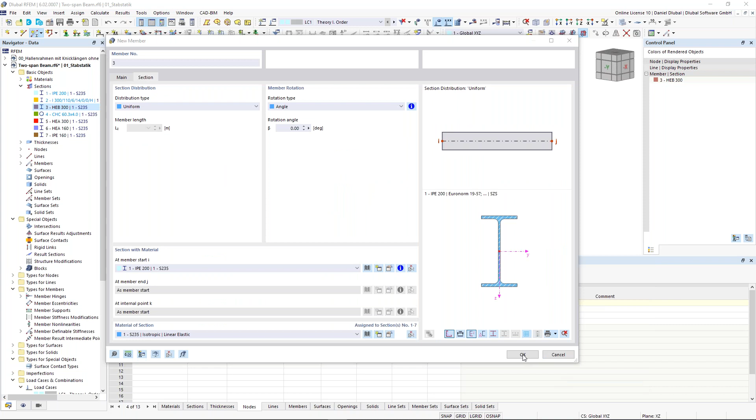So what I will do is I copy the whole thing here. And now again, my favorite function, drag and drop 10 meters along the x-axis. I put here an additional girder. It is a beam. The section is an IPE 300. I click on OK. And now I connect here these two top nodes and change the height of the nodes to -6 meters in the Z direction.

And now let's do the same as we had it for the Euler case 1. I go here again to theory first order, and now I activate here 10 eigenvalues. So yeah, and I say, okay, calculate it, please.

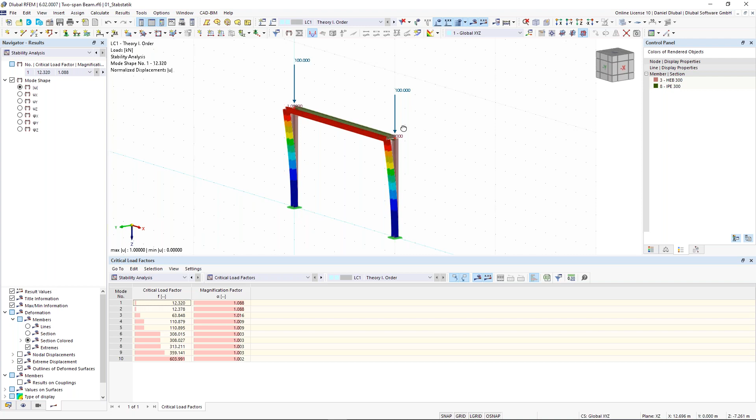So now let's take a closer look to the results of the stability analysis. And what we see here is pretty interesting. So because we consider the 3D model type, we see that the first eigenvalue is a failure out of the plane. So I increase the display factor. So out of the plane. This is pretty interesting.

Why out of the plane? Because we have here a failure of the weak axis of our HEB profiles. So the next eigenvalue is also out of the plane. Also interesting.

And the next one is in the plane. Oh, okay. So if I were a structural engineer, what I would do is avoid the bending, avoid the failure out of the plane by adding some lateral support. Okay. So let's take a closer look at the

effective lengths. So when I perform a stability design of steel members, I would take this effective length, and this is 2, because here we have our Euler case 1. So the next one, this one, for example, here we have buckling length mode 3 of 1.5 around the strong axis.

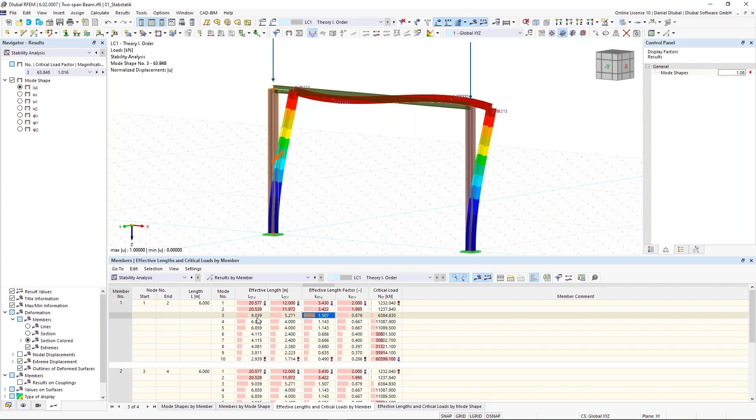So when I do a stability analysis of this steel column, the equivalent length or effective length would be 9 meters here. So maybe you can also take another look at that one. Here, this is number 4. And here we see the effective length factor is around the weak axis, in this case 0.67. It's almost Euler case 3.

So now I'm the structural designer, and I want to avoid the structural failure out of the plane. So what I do is add some lateral supports. I will add these nodes on the top, assign nodal supports, but only activate the U-Y direction, because this will be my lateral support. I click on OK.

I calculate the whole thing again. And one important thing is, don't mix the buckling shapes with the deformation shapes. This is a huge difference. I'll show you why. So this is the global deformation depending on these vertical loads. And the stability analysis, the buckling shape, is another one. So don't mix it up.

So now we have the first eigenmode in the plane, and this is maybe something we know from our studies. It looks like that. And now the critical load factor out of the plane would be here, the second one, and I had to multiply this 100 kilonewtons by 100 again in order to get a stability failure out of the plane. But this is quite unrealistic. But now you have a kind of feeling for how the structure fails when it gets too much compression force.

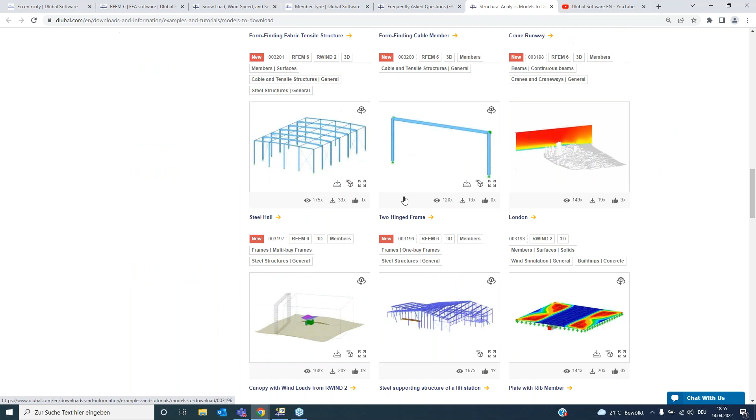You can see there's really a wide range of different types of models which you can download. And by the way, this is really new. We started offering this like a month ago, I think, Daniel. We have opened the possibility for you guys to upload your own structural models. You can go to downloads and info and choose to submit your own structural analysis model.

For example, if you're feeling creative right now, and right after this online training you want to try RFEM and make your own model, maybe you can submit it afterwards to our website, and we can post it on our social media as well.